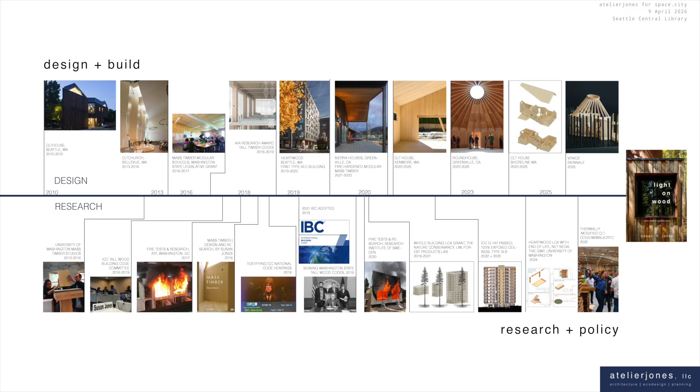Our practice has a very traditional bent to it in some ways, and a very atraditional bent to it. The top line is kind of the design and build that Space.City lectures often dwell within, the world of making architecture, making form, making buildings that inspire us all as individuals and as people to become better people, to create better communities, and to be the best of ourselves. But the bottom line is a little more odd, and it's called research and policy, and it really begins at an investigation about a material, which I am very committed to as we go forward.

This is the story of my practice, beyond atelierjones, some 40 years. I have to say, ever since I was a draftsperson in a small architecture firm in Bellingham, Washington, for a one-man firm named Sid Nesbitt, to whom I'm very indebted. He was a Cal Poly grad. I got my first job with him, and this is a story of those 40 years.

It entwines both memoir and a bit of an antidote to the sometimes black cape of the mantle of inscrutability that hides these lectures, sometimes with our practices, where we pretend it just kind of, as Frank Lloyd Wright used to say, shakes out of our sleeve. We know it's not that. Practicing architects know buildings don't shake out of our sleeves. They come with incredibly hard and dedicated work, ups and downs, twists and turns, whether you're Wright or whether you're Jones. So the book is a bit of an antidote to that narrative, and challenges it to some extent.

But I'm going to get into the moments about mass timber, because I think that's when our—Megan called it dissatisfaction—but with this brand of optimism.

What did you say, Megan? It was very sweet. I do believe that it's a deep optimism about the future of our profession and how we can contribute to some of the well-known challenges that we all face, namely climate change.

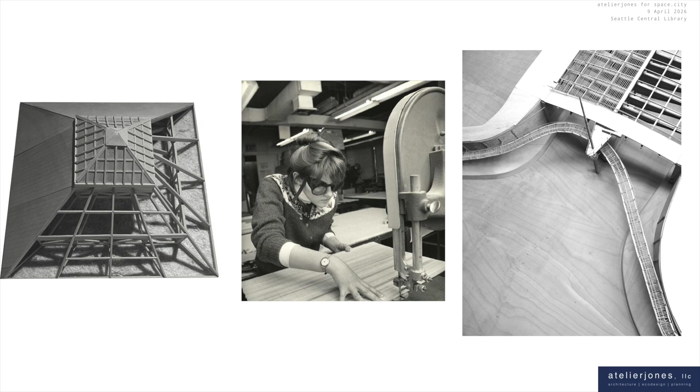And continuing that into my education, at the same time I was being presented with images like the last two we saw, we had one small element at the GSD to make out of wood, and that was the image on the left here. Four years later, as I finished my master's there, I was actually dubbed the woodshop maiden in the school—very foretelling of the future—as I'm making a wooden model, on the far right, of a bridge over the River Danube in Vienna. The bridge, of course, is made out of stone, steel, and a little bit of concrete to secure things. Every single project I did at the GSD, it was assumed I would be working in steel and concrete. There was no question about wood. Wood was for the primitives out on the West Coast, maybe.

I myself laughed at the stick frame hut that we had to do at the University of Washington when I came back to teach there some 10 years later. It was just a given that we were working with this.

So when you jump forward to 2014, you're recalling Corbusier's domino house of 1914, and then the work the Architectural Association did with Hanif Kara, the structural engineer, asking what if the domino house was reconceived as a wood pavilion? This was actually built at the Venice Biennale in 2014, out in the garden, Marina Ressa, where you begin to see the same relationships of form and structure of space possible with these vast expanses of structural strength.

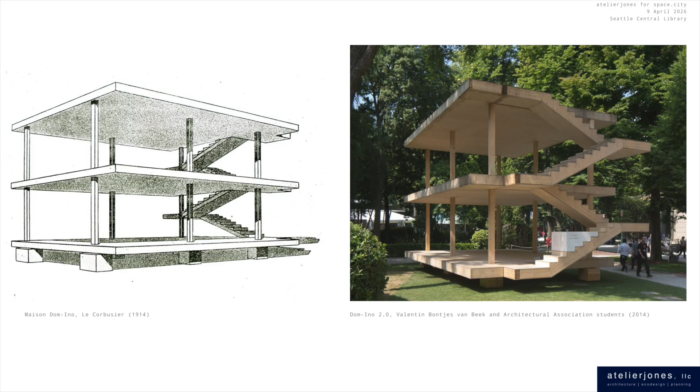From these wood CLT panels, you begin to see our architectural history through a different lens, and how this material impacts our form and space. This tectonic theme goes back to the days of the Parthenon.

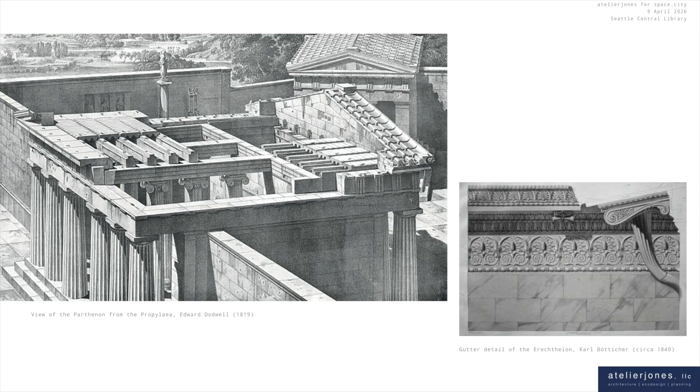These are drawings from Edward Dodwell in 1819, as the Germans and the English were beginning to discover the stone temples of the Greeks. You begin to notice the little dentils on the edges that reflect the wooden origins of these temples, none of which are extant now, but the ornamentation are remnants of these wooden temples.

And again in Bötticher, the way a flowing material out of water, a gutter for a stone temple, can be made out of stone. How does the material reflect the space and the form we're working with?

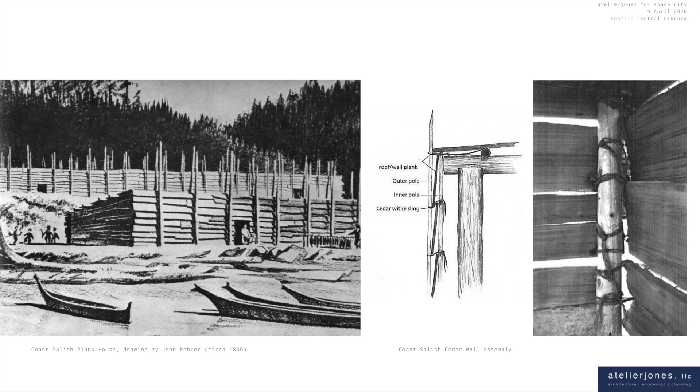That's not just an idea reflected in Western culture. This is the beautiful Coast Salish plank house, some drawings and images produced in the 19th century, with this exquisite detail of cedar bark torn and pulled gently from the cedar tree, wrapped around the cedar plank harvested from the cedar tree, creating a structure for the longhouses that dotted all of the West Coast for millennia until we came.

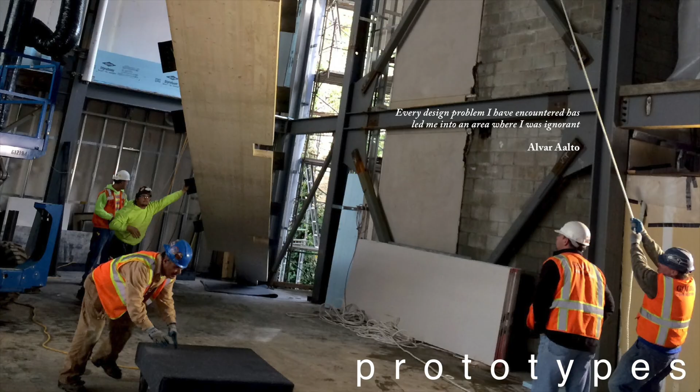This idea of bringing materiality and wood together. When we were confronted, as I was in this picture of the Bellevue First Congregational Church from 2015, with the construction of these massive panels, 8 feet wide, 6 inches deep, 40 feet long, not out of tilt-up concrete, not out of anything poured, it was 3 laminated pieces of wood laminated together and delivered with a couple of prefabricated cutouts.

What do you do with them? How do you make form? How do you make material? How do you make spaces that reflect that strange and new, wonderful material? I really believe this is the next wave of materiality, bio-based materiality, that hasn't been in this country since maybe the development of aluminum or steel and concrete of the early 20th century.

Early on in my practice, before I really knew any of that context directly, I had the opportunity to build a house for my family in Madison Park. We had bought the lot many years ago, saved more money, and finally had the chance to build what we hoped was a modest house of $750,000 on a small lot, about 2,500 square feet. And the opportunity to begin to shape what this privilege was, to build a house for yourself as an architect. It's a dream of every architect.

It's almost a cliche, oh it must be your dream house. That was the last thing I really wanted to do, but to shape instead the privilege of being able to do that for the greatest amount of impact, giving, openness, and sharing that is possible in a project. I didn't know where that was going to start from and where that was going to happen, but we had the opportunity.

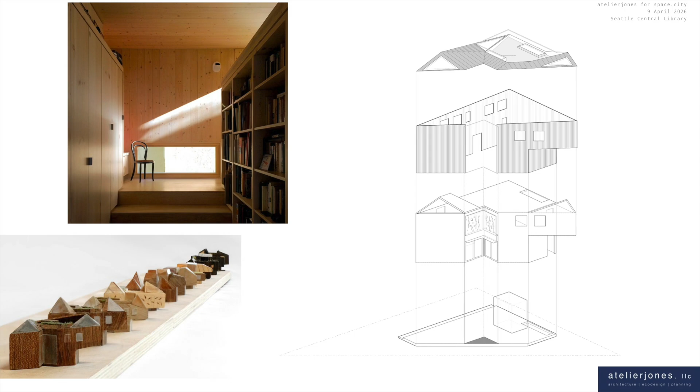So I'll just go through these prototypes very quickly. They were very experimental. I didn't know much about CLT at the time. I taught one incredible studio at the University of Washington. Deep thanks to the faculty there, the students there. You're all credited in the books.

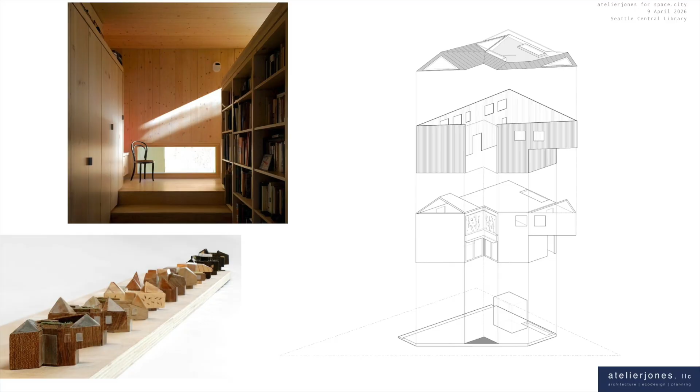I began a series of making models, trying to understand this god-awful triangular lot. No architect wants to be faced with an isosceles triangle. Please run from that. That was not the point of buying that lot, nor was the form making of that. But it was an extraordinary thing that did actually lead to some interesting volumetric expressions that I was able to work with because of the prefabricated qualities of the house.

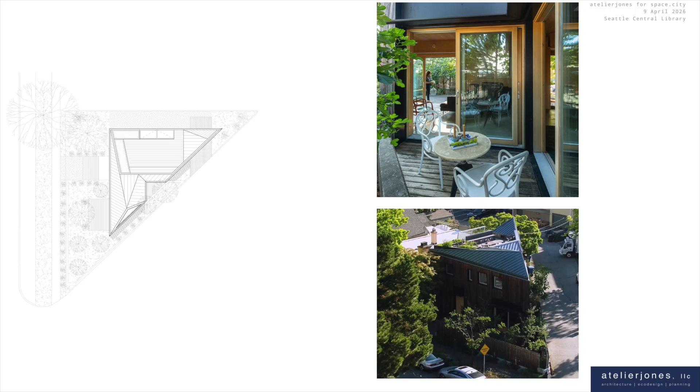It's a 2,500 square foot lot, but with extreme setbacks on 2 sides, 3 sides actually, a 20-foot setback in the front, which cuts on the longest side almost all the entire lot off. So it's a very small footprint, about 700 square feet. The house is about 1,500 if you don't count the roof deck on top.

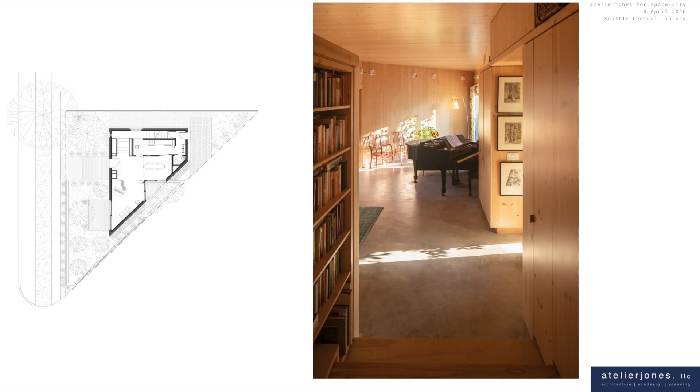And because of the diagonality, we were very interested in trying to create views and vistas through one layer after another, from one side to the next. So we were able to create the spatial dynamics, both through the plan, which we were bound to in many ways, and the section. And as we went up through the section changed, and we wanted that triangularity to be felt in section as much as in plan.

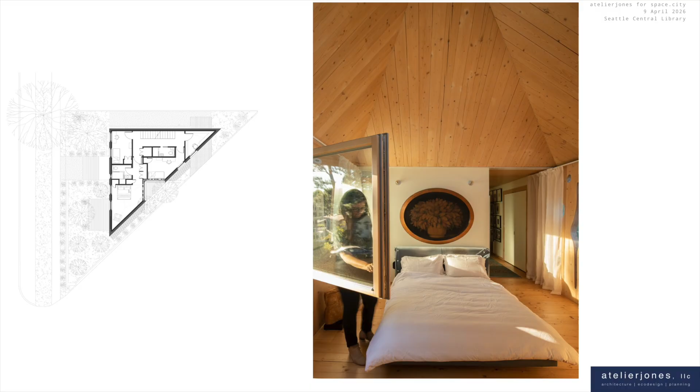And this is where we found our friend, the prefabricated elements, to create these panels, which then were prefabricated. This is a small wooden screen, privacy and light screen for my daughter's bedroom. Working with Structurlam at the time up in Penticton, and from a small CAD drawing reflected into this cadwork drawing, into a machine that put out a 7-foot by 7-foot panel with these beautiful intonations of what wood wrapping around grain, wrapping around knots feels like and sounds like, and echoes its form making into the wall that holds the light back.

The prefabrication became a very powerful element to create not only those more decorative or ornamental qualities of that wall, but also the sheer space and the light and the form of the rooms themselves in both plan and in section. These are single panels, 3 or 4 of them per room, and they were dropped in literally on site from a 40-foot crane out in the alley in about 20 minutes.

And I fell in love with that process, and it really opened up a huge amount of opportunities in my brain to acknowledge the fact that this material was indeed something very special beyond just its wood material. It was indeed a 21st century material, and I was very keen on investigating it.

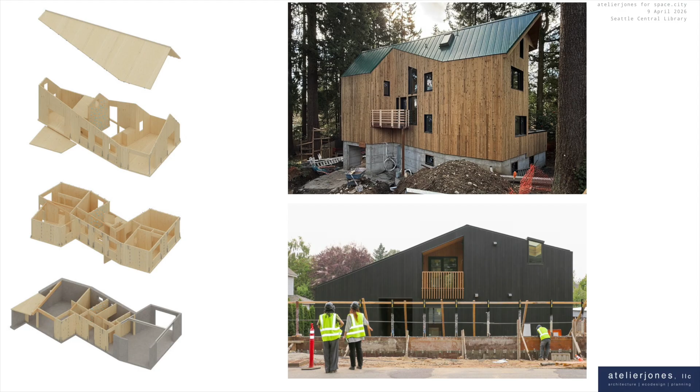I will say that investigation continues. We are working on 2 other houses, which I consider a family to the CLT house. This is the Kenmore house on the bottom, which is under construction. I think the clients are moving in maybe next week, maybe today, maybe they already were last week. And the Shoreline house, which hopefully people will be moving in at the end of the month.

We're very close to pulling the CO on both of these. And I would say we have pretty happy clients on both of these. And both of them had the power of this prefabricated work, especially in the Shoreline house, which you see depicted in Matt Catro's beautiful axonometric exploded there. The geometry is not simple, it's not clear, and yet when those panels go in, they go in perfectly, exactly right, because they have been prefabricated in a shop led by the shop drawings by Megan Doring.

And I think they're perfect, but Megan can tell me what it really was. So the next project after the house, and I'll go through these rather quickly. I think these projects are somewhat well known. I just want to lay the groundwork of these prototype projects and what we learned. This is the Bellevue First Congregational Church.

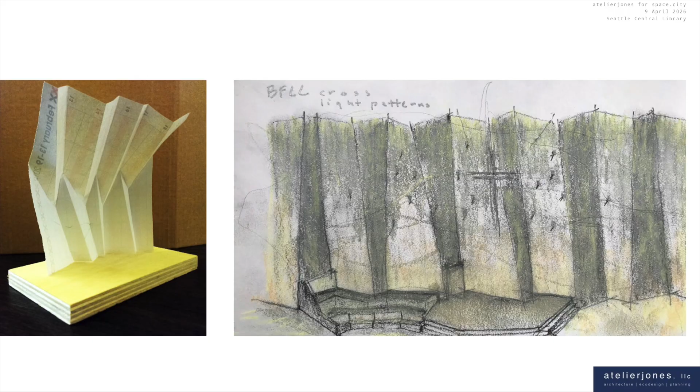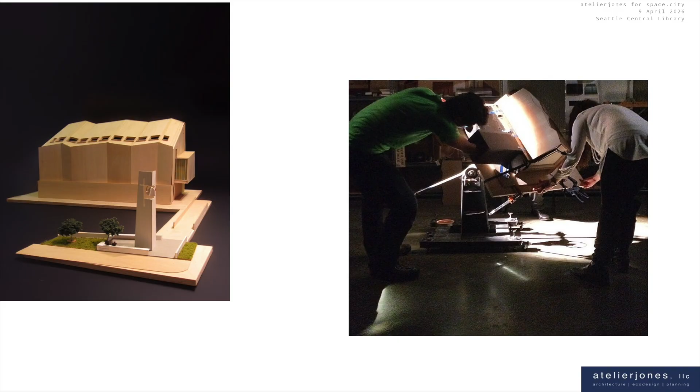We were developing light models. This is Joe Swain and Marisol Foreman in the light lab at the University of Washington, an extraordinary resource for those of you who are not aware of it. These are the models that went into this addition to a 1970s building—beautiful light models made in the office, physical models that then began to model the project.

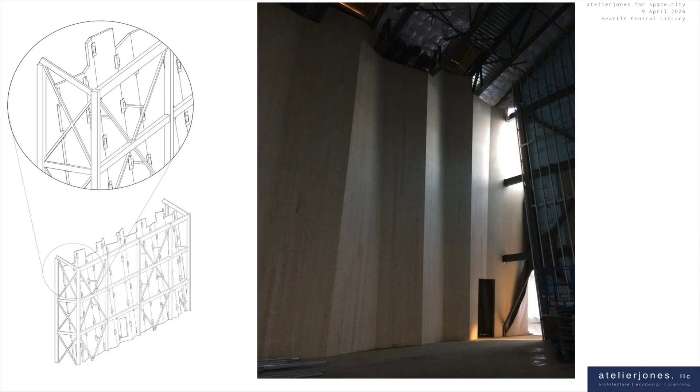The finished wall on the right. This concept, this church, really opened up to me the power and importance of hybridity. We don't design concrete buildings, we don't design steel buildings, we don't design mass timber buildings.

We design buildings which have a hybridity of systems. That includes steel, concrete in the foundations, and in this case steel brackets and vertical gravity systems for these 17 panels on the back. The importance of that was really clear—we're not just building in one material. Of course, that's an obvious thing to say to any practicing architect, but it did take the industry a while to recognize that.

Some final pictures by the very talented Lara Swimmer.

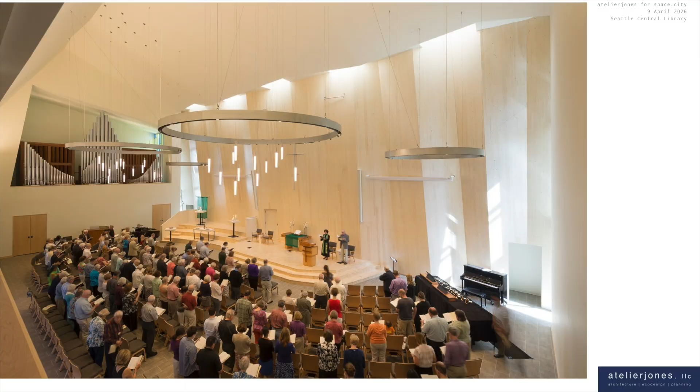We were very interested in the way light came into this building. We looked a lot at Aalto, his churches, especially the Church of Three Crosses at Imatra, and that borrowed light from buried sections was a huge inspiration for us.

It became clear around 2016, when that church was opening and we'd been living in our house for about a year at that point, that we were working with a very different sort of material, and that it was going to, like it had in Europe, quickly change and transform the US building market, even though it had only been two or three years in this country where built examples had happened.

It was also clear that it needed a tremendous amount of care. I am really touched by this quote of Zumthor, because it really expresses exactly the way we needed to go about the emergence of this material and help shape the debate.

Because we all know mass timber comes from wood, and wood comes from forests, and we know our forests need help. One of the things that became clear to me is that mass timber was a new agent—a new element of energy and people coming into this divided, truncated environment of environmentalists versus timber and lumber guys, industry versus environment. Architects could become a new actor and agent to help understand and dissect some of that argument.

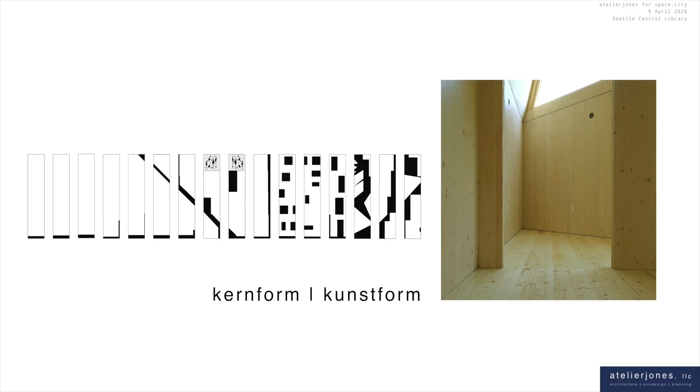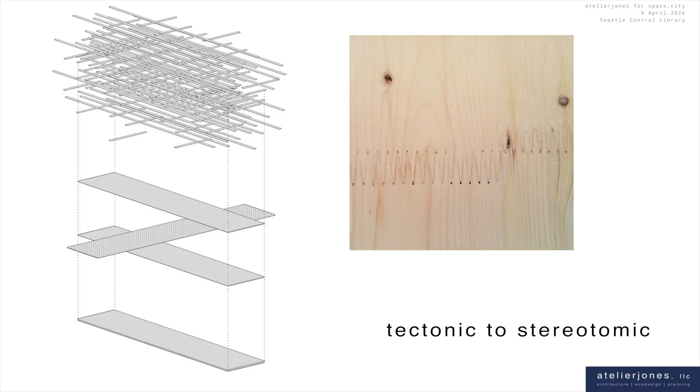The fascination of this material, where all these pieces come together—little tiny 2x4s, 2x6s, 2x8s—making these massive stereotomic panels knitted together with finger joining that you can just see almost like a Japanese tracery in the walls. The power of the prefabrication.

Here's Dave at our house—the 857 connections on that right hand. How do we harness the beauty and power of the machine in a factory, with kids running it in rural areas who have great educations and are getting really good jobs, to make this model like Thor DeVoe did for me in 2014 when it arrived on my desktop one day. It's those 857 connections that hold my house together as of today.

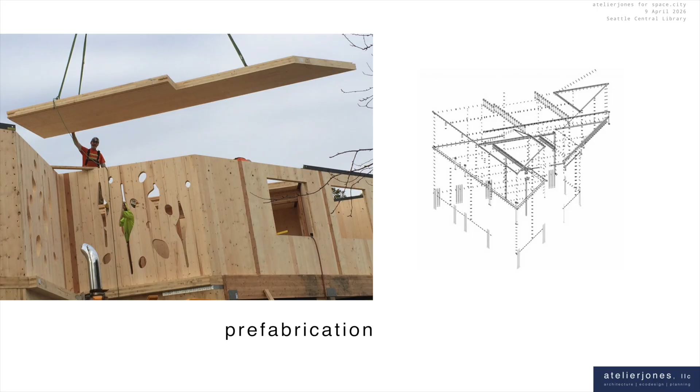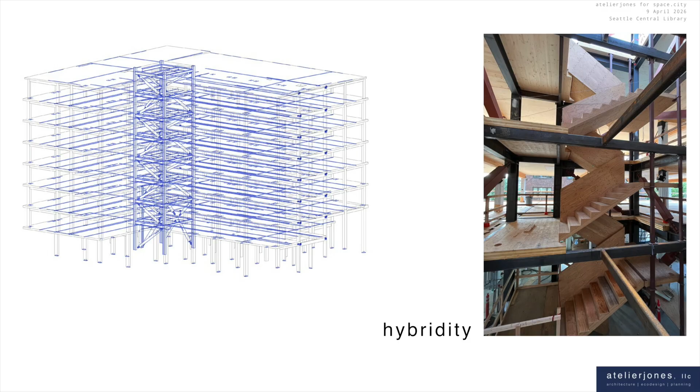How do we think about the hybridity, how that works with different trades, different contractors coming together on a site, different gravity and lateral forces, bringing the steel where it's needed, bringing the wood where it's needed. And how do we go back to where the panels are produced, in factories like Mercer on the left and Kalesnikoff on the right.

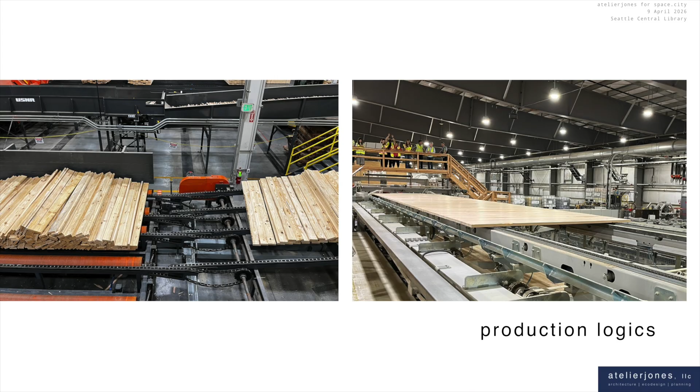And how we are opened up to the power of checking your work—the old-fashioned idea that we need to confirm our carbon assumptions are actually lower, that we need to engage and invite experts into this room, not assume we know everything as we often do as architects, and to reach out to other people in the community who understand life cycle analysis and can do the studies and show us the way.

This is a small work that we did with the University of Washington, in my 2013 studio with Kate Simonen, when she was just starting, before she got to be the Carbon Leadership Forum guru and god.

And the importance of checking your work, being honest and open, and being careful about some of those carbon assumptions that we tend to throw around with big numbers, but can they be backed up with careful, thoughtful, collaborative science? And then, of course, measurement.

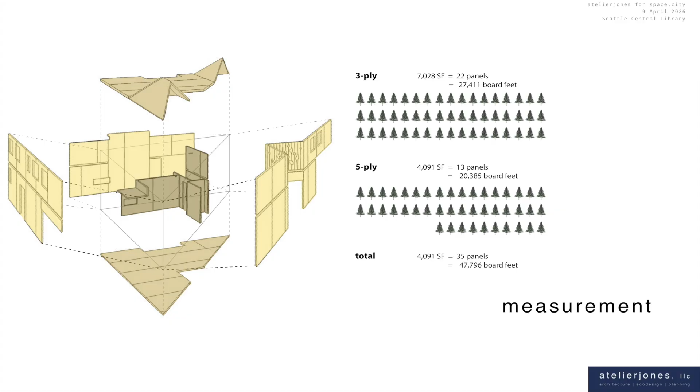This is a drawing done by some of the students in my University of Washington 2013 studio. This is so cool, we got these shop drawings, we've got this prefabricated model, we've got a CADWorks model. We can actually count the amount of board feet coming from this house, and the number of trees they come from, and the number of acres they are grown in.

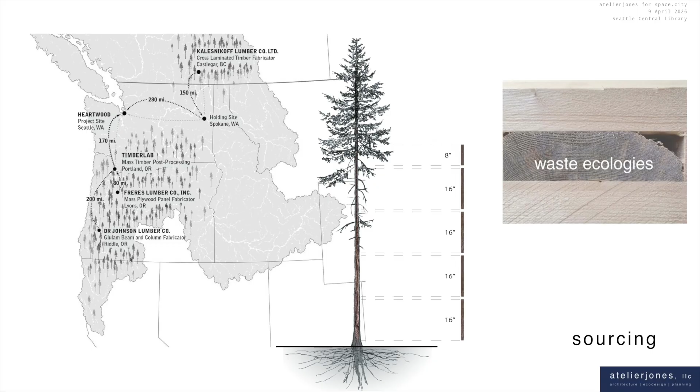That led us to this all-important notion of sourcing, which is a lot of what I alluded to a few minutes ago - the importance of understanding your bioregion, the place that you come from, the place the trees and wood come from, and how the origins of that place can help promote this material in a healthy, sustainable, long-lasting, durable way, so that we have healthy forests for the next seven generations.

So I'm going to transition here to the forest notions. The forest has become a very important part of our practice, both directly and indirectly. And I bring up this quote by the Epic of Gilgamesh. I'd like to think that we're all guardians of the future, that everybody in this room is, but I'd like to think that atelierjones is certainly a guardian.

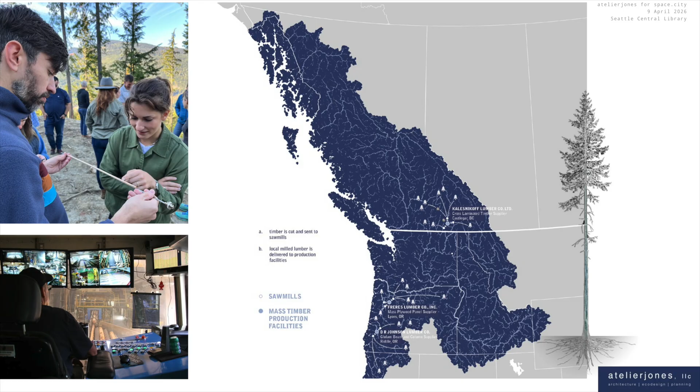We've taken multiple field trips as a company. This is Eleanor with our structural engineer, Adam Jongaward, all around the Cascadia biome and elsewhere, to really understand how the forest and lumber industries work, what kind of extractive qualities they use in the forest to bring the lumber out, and what kind of healthy strategies they use to bring the lumber out. It's an amazing in-depth curiosity that has fueled our firm for decades.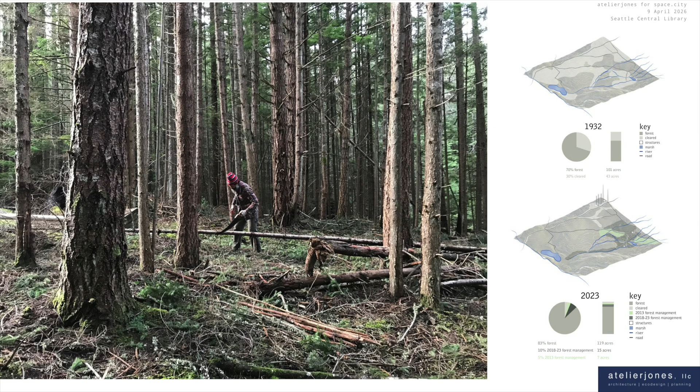So on this piece of 140 acres on top of Mount Constitution, Marco and I and my family and a lot of friends have really begun a very thoughtful, labor-intensive, labor of love work to begin to thin these trees on my grandfather's property, take them out, and preserve the Douglas firs, which you can see here in the corner, and preserve those that have more light coming down to the land.

It's been extraordinary work here, and this young man shown here, whose mother is in the audience with a big grin on her face right now, has been a huge talismanic force for our family and friends, and also my office. In the middle, Matt Castro, again, chainsaw work.

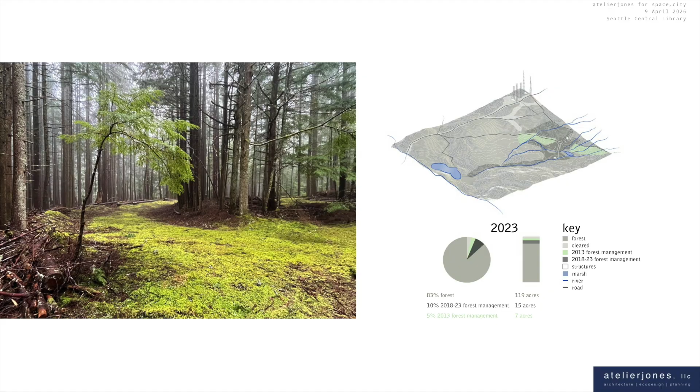We have trees up there. We bring in local labor, local partners like Retardi in the middle, and we've had a great time—fresh oysters on the beach. It's been amazing, and from that we've begun to create spaces like you see on the left, which did not exist before. The light comes down, it sparks the green, and makes those larger trees grow healthier.

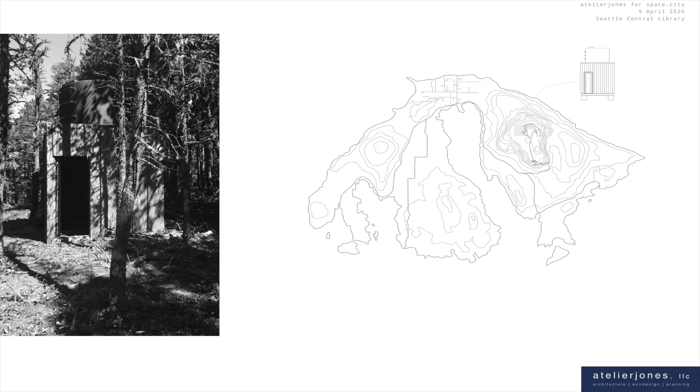It's been an amazing immersion and really a teacher of how forests need to be healthy and how we can help make those forests healthy, which is a lot of fun in between it all. So as part of the project to work with the land, we built a little constitution shed a few years back, a shed that had been a water tank off the mountain. It was one of these wonderful retreat projects that houses a space for forest workers, forest managers, friends and relatives, and even 80 or 85-year-old mothers who come to visit to have a rest.

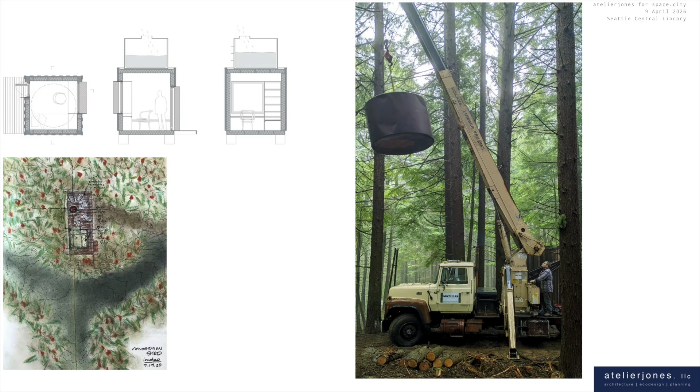We ended up replacing a lot of the rotten boards from the shed that was holding the water tank, working with the existing wood on the mountain to carve it up and replace many of those rotten boards with local labor. Rolf Erickson is an amazing partner in all this—you can see him standing down there holding that crane at the water tank. He was kind of a genius working that crane in the middle of January, I think it was 2021 that we were putting this project together.

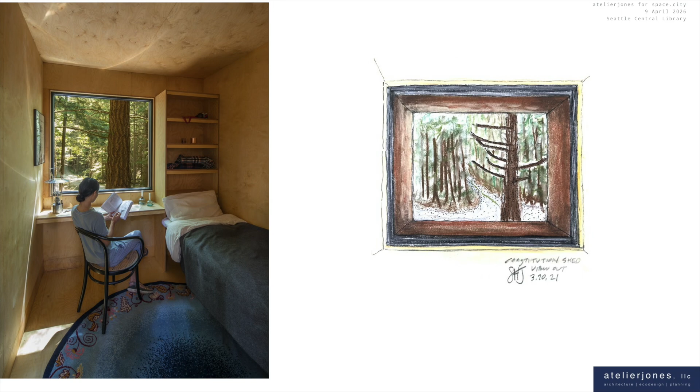But this is a small project, not a large project, because the question of scale became really immediately obvious.

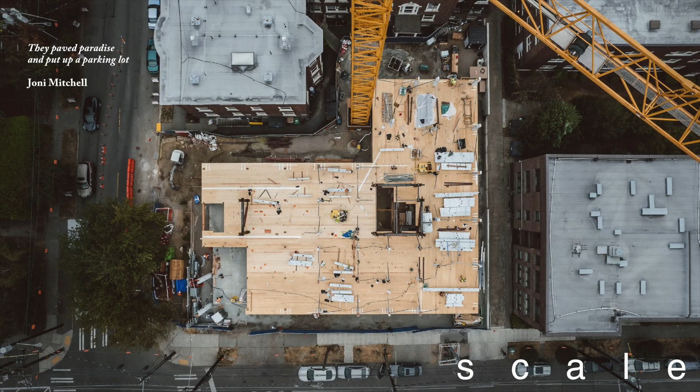I love this quote by Joni Mitchell—we all grew up with it. But what we did for Heartwood in this project was actually put up homes on top of a parking lot, which was a real twist on that.

Now, to do that, it became obvious from those carbon studies we'd worked with that you really needed to go up to make a big difference on the question of carbon. This wasn't just a matter of substituting mass timber for some single-family homes.

And so there was this period of time—16, the church was finished, a house was finished—and AIA National, because of these two projects that had gotten relatively well known, called me to join this code committee. The code committee changed the codes to allow mass timber to go up and up and up.

There were a lot of great people in Seattle applying for this committee avidly—it would have been fantastic to be on it. When AIA National said, Susan, we want you to apply for this, I said no, I don't need to. We've got such good people in Seattle—Hunter, Joe Mayer, all these people applying—and they'll be great, and they know the codes. I am not a code architect. I'm not one of those people that designs by the code. I respect the code, I like the code, of course I need the code, but I'm not a designer that holds the code in my head and makes it all happen.

No, we want you to join the committee. Thank you very much, no. They called again about two hours later—we'd like you to join the committee. Thank you very much, we've already talked, I appreciate your interest, you've got great people, just work with them, thank you very much. They called again, they emailed again, they called again, they emailed again. By the end of the week I sent in the two-page application.

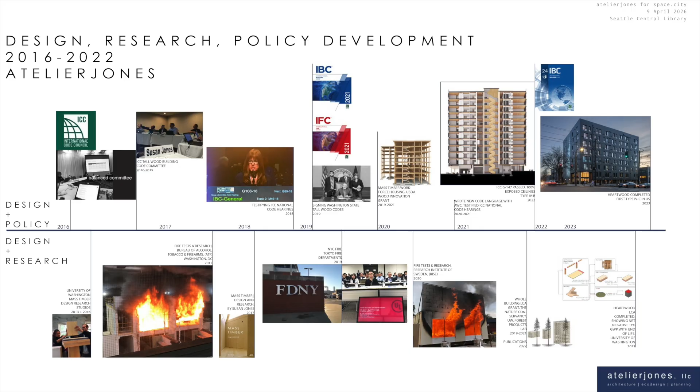By the end of that day I had an invitation to go in July to Chicago O'Hare to sit with all these people, watching the eclipse, to do research and policy development for the ICC, International Code Council, to change the building codes for the US—to change the IBC, to change the IFC—and sit at committees like this one for weeks at a time over a two-and-a-half-year period, all pro bono. I did get my plane tickets paid for by the AIA, that was about it, and my hotels.

If you look at these committee members, there's one steel guy, one concrete guy, one wood guy, Sam, biting his nails right next to me - Sam Francis is my hero - and six fire guys, and the chair of the committee is a fire guy. These fire guys aren't your average fire guys, they're 6'9", big chiefs from Columbus, doing all the work, talking about having a bad day.

You want me to build a tower out of sticks and have my boys not come back? What am I going to tell everybody? I can't build a tower out of wood, Susan. He brought tears to us as he talked about his boys not coming back. This was the kind of emotionalism we were dealing with on the committee, not to mention the industry from concrete and steel, who wanted nothing to do with a wood mass timber tall building.

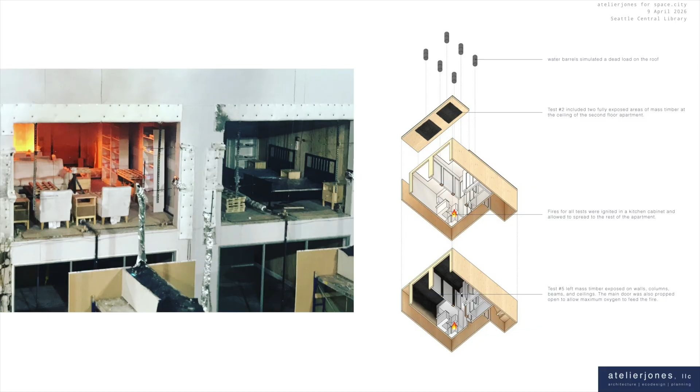But finally, $1 million later, test panels outside of Washington, D.C., test compartments, as drawn here by Matt, two stories high with massive amounts of fuel load - the highest amount of fuel load ever put into a test inside a structure. Burned it down 5 different times for 4 hours each, with no sprinkler interventions and no fire department interventions. Because the sprinklers always go out again, Susan - when you have a bad day, the sprinklers go out.

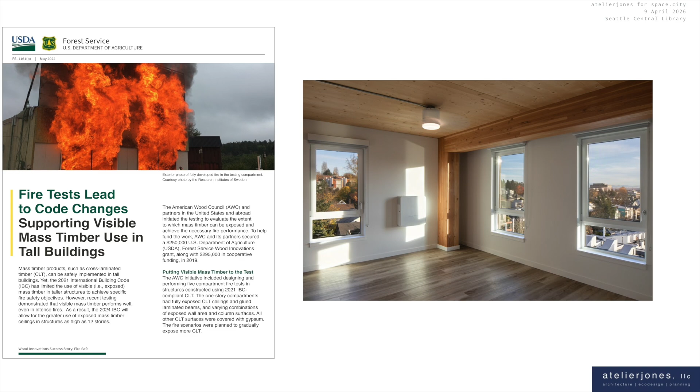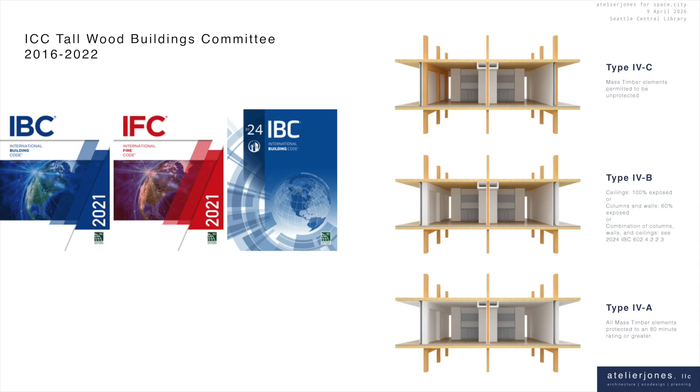It was a massive wordsmithing effort for 2.5 years, all pro bono work. By 2022, we'd finished 4 or 5 code revisions, and they stand in the code today. It would allow us to go 8 stories up to Type 4C, Type 4B up to 12, Type 4A, with different amounts of coverage in the middle of that.

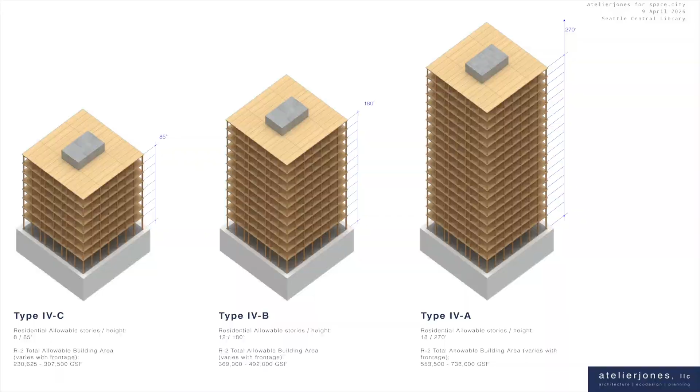So this process led to a project that I'm really thrilled to talk about - I hope a lot of you know about it. It's called the Heartwood Project. It's here in Seattle, just up the street on Capitol Hill. An amazing team led by Ian Maples, here in the room, delivered Heartwood, a 67,000 square foot multifamily workforce housing project, which is a replicable model for projects all over the country to work with these codes. It's built on a parking lot, as I mentioned.

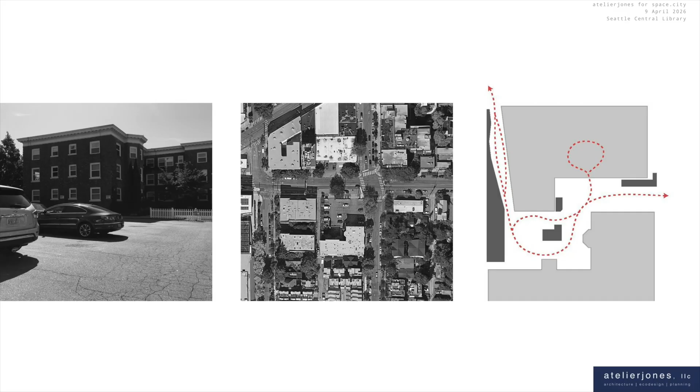Thank you, Joni - I got to do you proud. It's next to a community roots housing building called Helen V. It has 126 units, all affordable, workforce housing between 60 and 120%. Built with a little courtyard between Helen V and Heartwood, a really common open space with beautiful little amenities at the courtyard level.

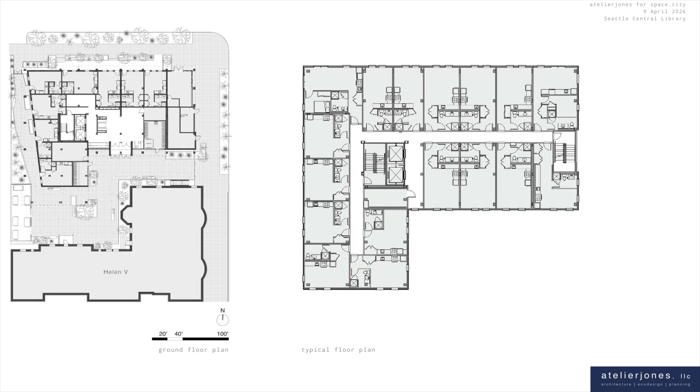We went through the MUP process during COVID in 11 months. We got the building permit submitted in 6 months. It was an extraordinary team effort in the middle of COVID - as everything shut down around us, we were scattered to our Zooms, having 12 hours of Zoom calls for that whole period of time.

I think it actually was a help, at least to Ian - he liked kind of holing up in his home, and it worked out really well. It's a simple double-loaded corridor with a lateral steel core, and almost all of the units have exposed columns, beams, and ceilings.

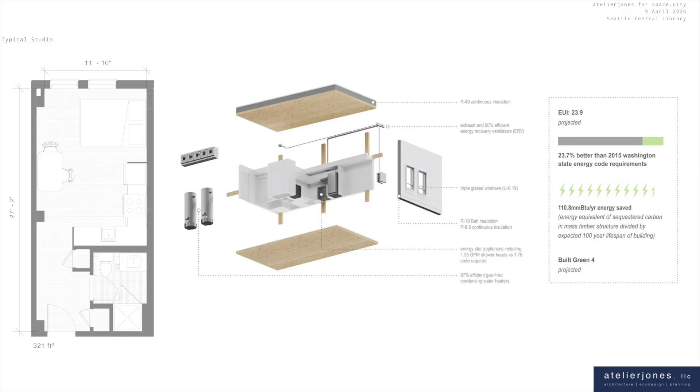The units are, this is the smallest unit. We were testing it at 11'10" clear, about 12'2" on center by 27. It's a very low operational carbon, a good EUI. We have triple glazed windows on the exterior, some extremely efficient gas boilers before the energy code went all electrical on us. And we were very proud of the operational energy it was able to work with, not to mention all of the embodied carbon, which was still a new and emerging concept even in 2019 and 2020.

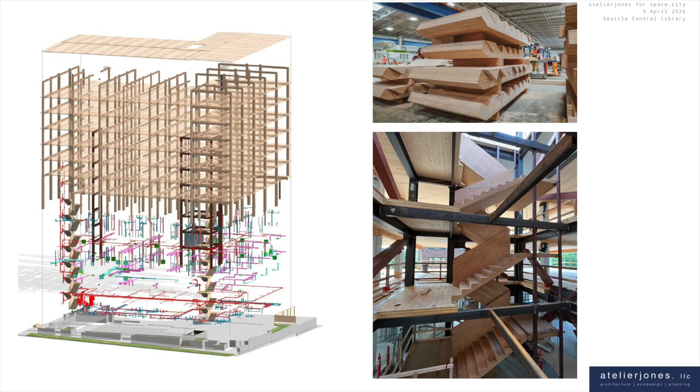Lots of BIM coordination, again led by Ian, thanks to their incredible Revit work. Tremendous coordination so that the panels arrive on site with the holes drilled in the right place. Panels going up on the site, led by Timberlab in a beautiful and clear way. The mechanicals are going, plumbing stacks are going up and down on this very tight site on Capitol Hill.

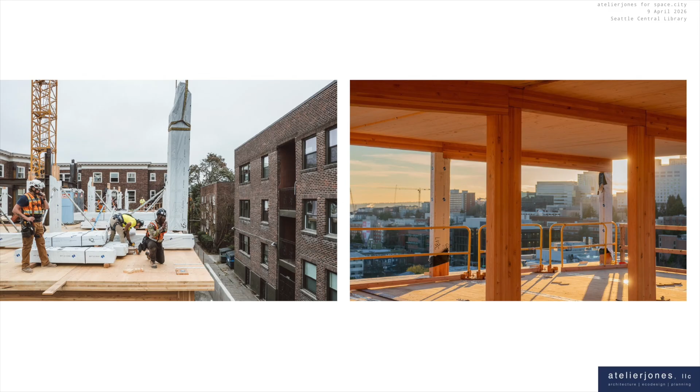It was finished in 2023. The building is now 95% occupied. It's under management by Great Expectations, an amazing management firm started by Ben Moritz. Really grateful to Community Roots Housing, our owner, who worked with Skip Stone and AP Hurd, who some of you may know, to develop this project. There were a lot of risks taken and a lot of effort that happened between AP and William Silva, the director of construction for Swinnerton, to bring this project into fruition.

The units are simple, they're small, 400 square feet average, there's 13 one-beds, but they also have this glorious view, especially on the upper floors, looking over the city of Seattle, over to Mount Rainier. The sun is streaming in from the south and the west. And there's lots of wood on the inside.

Ian looking pensively over the city.

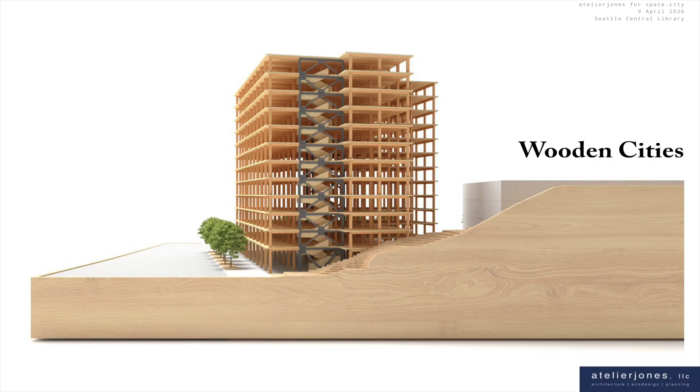So this model is something that we are really excited about beginning to work in other cities. This is a model we made for a local project here, just a beautiful, simple expansion of what we can do as a future here, all based on this sort of spaceship from the sky landing into our world of this beautiful no-steel, all-wood joint that can be repeated again and again and again in projects from Harlem to Manhattan to Seattle. We were really interested in taking that all-wood joint, using Heartwood as a piece of how this all works together by understanding the LCAs.

I spoke about the importance of checking your work. In order to stand here before you and say wooden cities are the thing, it was really important to be able to count this wood, count the steel, count the concrete, execute the LCAs. We worked with incredible teams at the University of Washington in the College of the Environment with the School of Environmental and Forest Sciences, who are professional LCA scientists, and began to look at the work of Heartwood, how much it would take to build a concrete equivalent, that gray bar on that side.

We built second Revit models, equivalent models of the exact same building using a commercially viable concrete structure designed by structural engineers who knew what an efficient concrete building was. Calculated the carbon of that superstructure, that was the 100%. Calculated the carbon of the wood without the embodied carbon, which is the green line, but just the actual carbon it took to build the building, a good 38% less. Cool, we felt really good about that. That's actually a real number that can begin, it's not going to solve climate change, but it is going to make a mark on it.

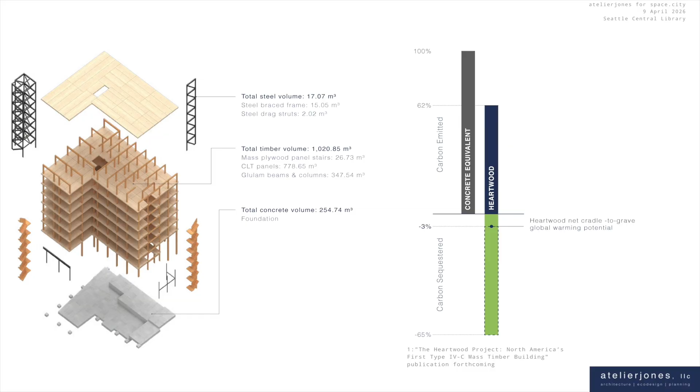And then when you count the stored carbon, which goes all the way down to that green line, pops it back up from the top of the blue line, you get a net negative building for the carbon at -3%, which we were really proud of to be able to talk through freely. But it really does depend on what happens at end of life, and those geeks out there who are life cycle analysts really begin to see the difference between what happens if all that carbon is released back into landfill uncapped.

Does that carbon get released back into the atmosphere? So we went through a whole series of work with doctoral student Christina Jarvin to understand what happens with the second life of that building, the second life after that, the third life in OSB and particle board, and then what happens in landfills today.

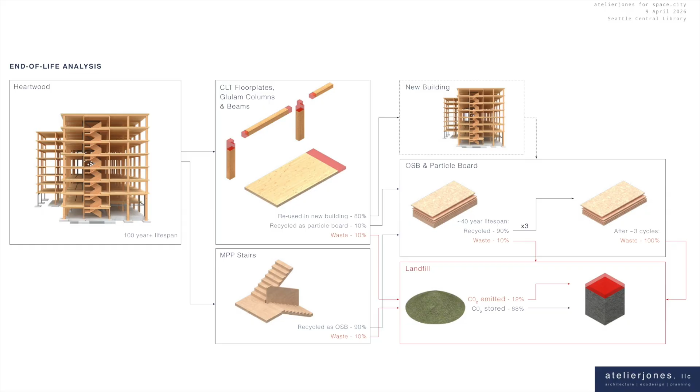It's actually not just emitted into the air, it is capped. 88% of it is stored, according to research that's beyond my pay grade, and only 12% of that is emitted in total. So out of all of that, that's where we ended up with those numbers of -3%, and it was really gratifying to see.

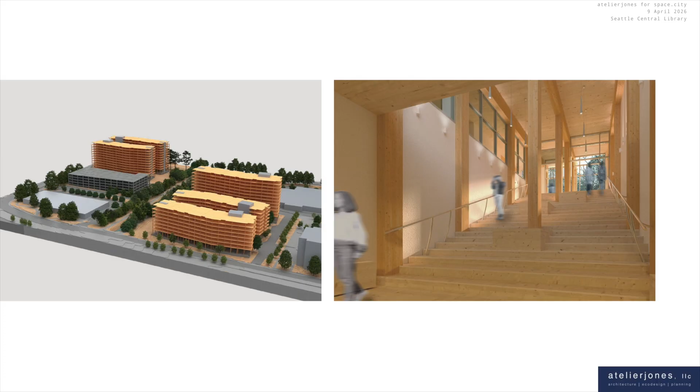These are studies that we did in Silicon Valley. This is a building that is still on our boards as of just last week, in fact in Harlem. We really hope to bring wooden cities to the US and begin to transform bio-based materials into our building as usual construction. It's been a really exciting journey.

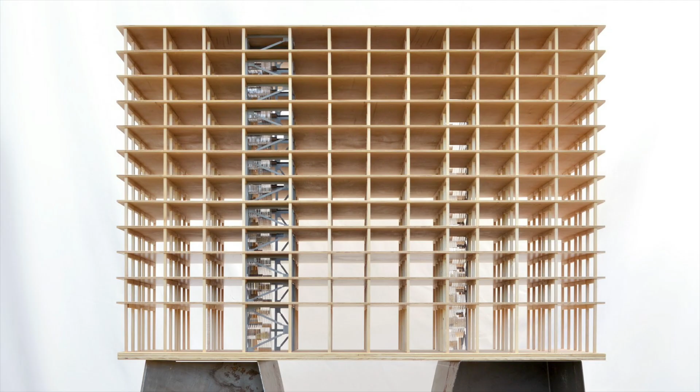The impact of those fires swept through in an instant, in 8 hours. Luckily there were no people - there was some advance warning that the fire might do that. There were no lives lost in this forest fire, but the entire town was wiped out.

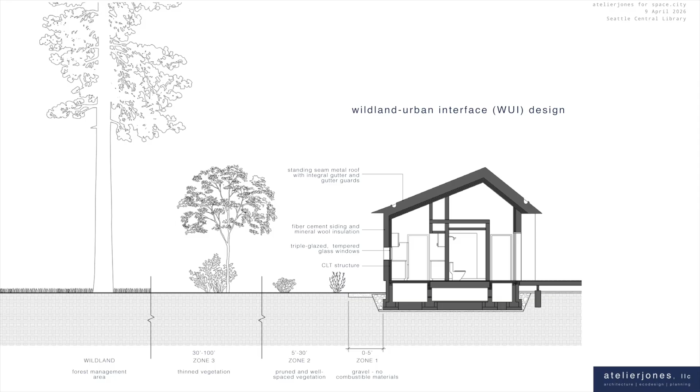While I can't ever recommend that I would ever be in these houses, to build back a home that follows all of the wildland urban interface design, the WUI codes which are part of building codes all around this country, especially in California - but because new construction doesn't often get built with them, we're challenged because existing infrastructure is far less fire resistant. But with thoughtful, careful work and design, we can begin to build back houses that have a strength and coordination to them.

So with that, we started with House 1, 2, and 3, small little houses with beautiful wet cores in the center, some very simple open mass timber design on the interior, really beginning to use the power of the material where it needed to be used, with concrete foundations.

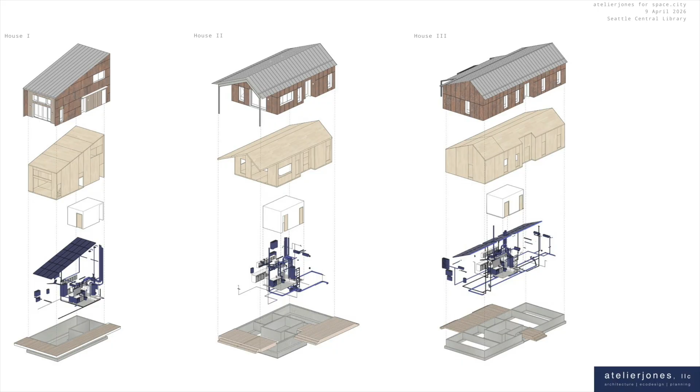We had a little wet core in the middle, with mechanical, electrical, kitchen and bath, and mass timber on the exterior. We also used plate steel and a good 6.5 inches of rock wool to protect from that WUI barrier as well.

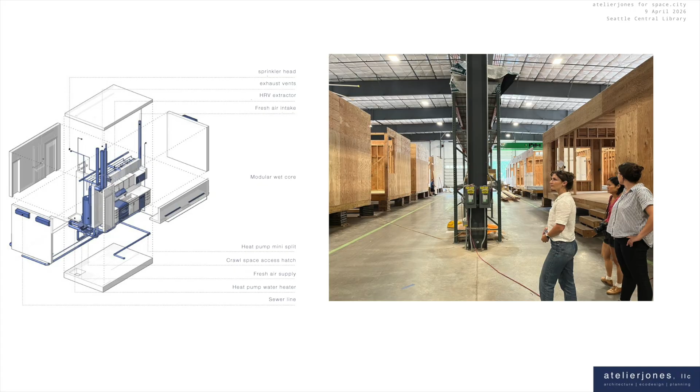They were delivered to the site, put on the concrete foundations with a big crane, and stood there awkwardly, beautifully, sweetly in the desert for a couple of days until the mass timber came in about a week later, shrouded those houses, and moved forward into the final build.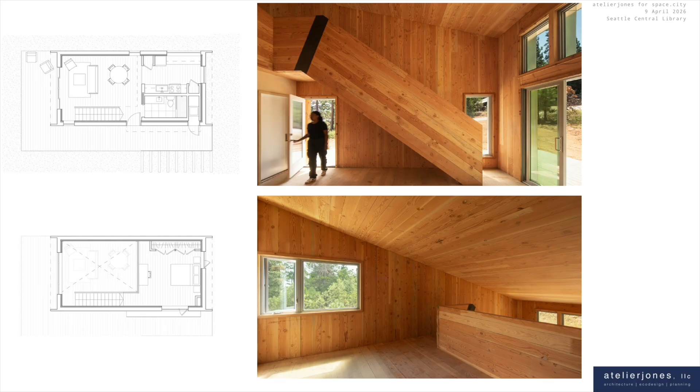This is house 1, the loft house, overlooking the Greenville area. This is our friend Jordana walking through the house. Again, these are Lara Swimmer pictures. Lots of exposed wood, lots of exposed interior structure, and then the exterior, all the mild steel from the exterior.

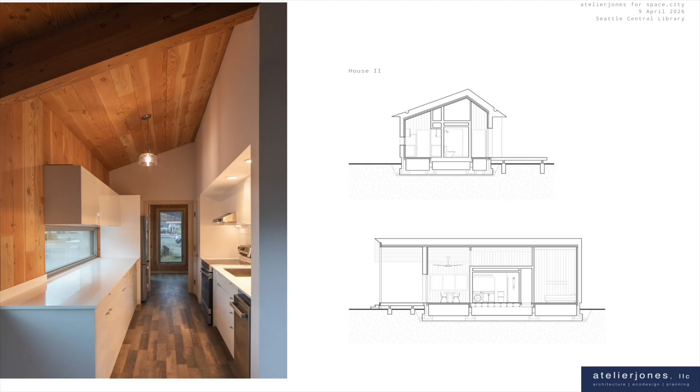The wet core in the middle, and some of the images here.

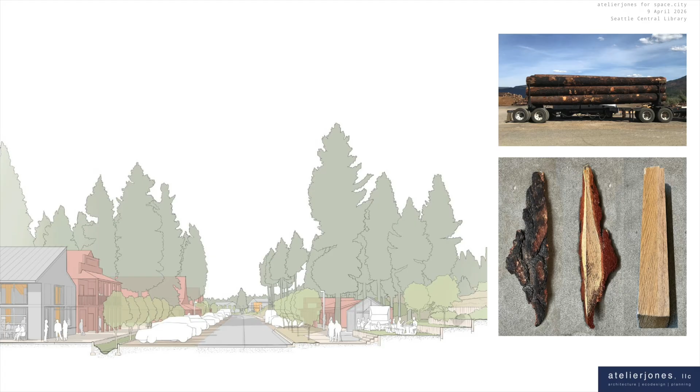We're still doing work down in the area. This is a project in Blairsden. I'm not going to go into a lot of detail on it, but it's been really fun to engage with these same principles in the projects you see here, some small houses, some small lanterns, and a marketplace.

So I'm going to end on this project called the Roundhouse, which reflects a really beautiful moment we had with the Maidu in Greenville, California, after the 3 houses had been built. We were asked to come to the table one night in January of '23 and talk to the Maidu elders about what their idea for the house is.

This small sketch at the bottom by our client, Mary Joseph, reflects the historic roundhouses of the Maidu. This one above was actually built by one of our clients, Harvey, who also explained this diagram on the right—how did you create this roundhouse form? We asked him. He said, oh, it was easy.

You just pull it back, you hold hands, you gather everybody into a circle. The circle moves out, creates this broad circle of, in this case, 36 feet, which happened to fit our site perfectly. And that becomes the diameter of the roundhouse.

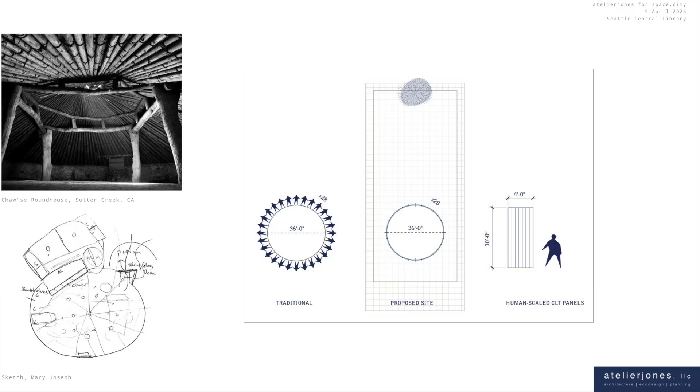And then we were able to use CLT panels, which just happened to be this modular 4x10 panel size, to create the circle as a segmented circle around. The plan is working off of many, many traditional forms.

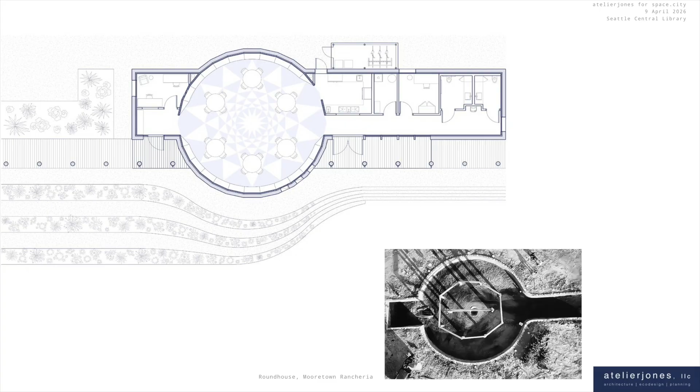This is the Mooretown Rancheria home. Had a small gathering space for their tribal events, for their children after school. The school is right next door. And a series of small offices that gathered, as well as the all-important kitchen for Mary to make what she called their Indian tacos. Charlene told us all about how to make those Indian tacos, and they were really, really good.

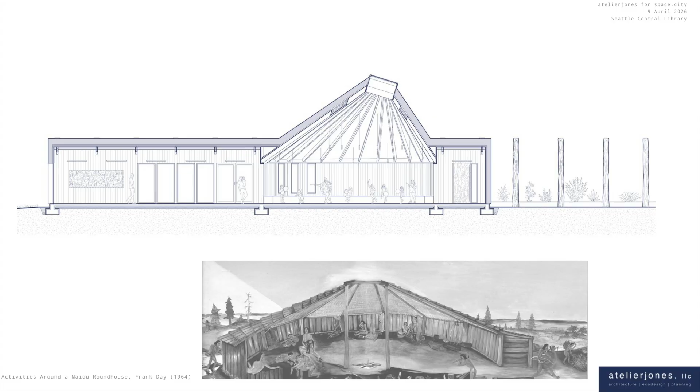The section is lightly inclined towards the summer solstice sun that comes in at 1:05 in the afternoon, much to Matt Catchell's relief, as it actually did come right through that oculus. And it's a beautiful ancient typology.

We used mass timber in this case in a really beautiful and perfect way to begin to evoke the form of those circular areas, because of the way the circles were softly created to dissolve those facets, creating a smaller space within, shrouded again by mild steel, within the desert, within the landscape.

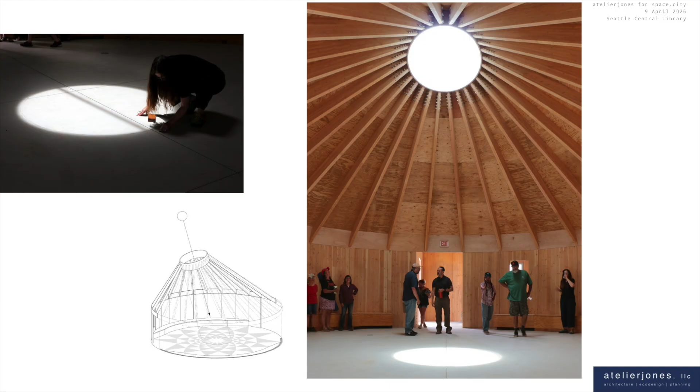And this is a picture of the visit at the solstice last in 2024, drawing and etching the shape of the light where it should be.

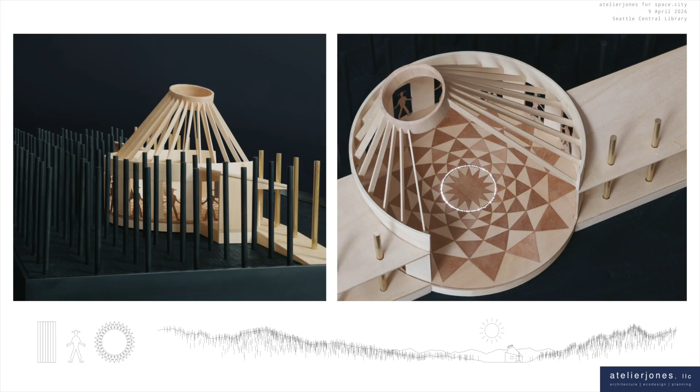We were invited to present this project for the Venice Biennale last year as part of the porch that exhibited the project in the U.S. pavilion, helping represent the U.S. as one of 54 firms.

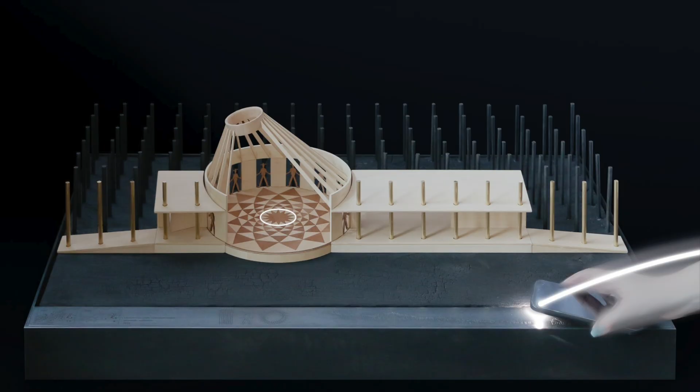We built a beautiful model with a lot of help from our office, of course, but also Jack Kearney, who helped us with the black and steel, and a longtime friend from Company K. The model was exhibited for 9 months last year in Venice.